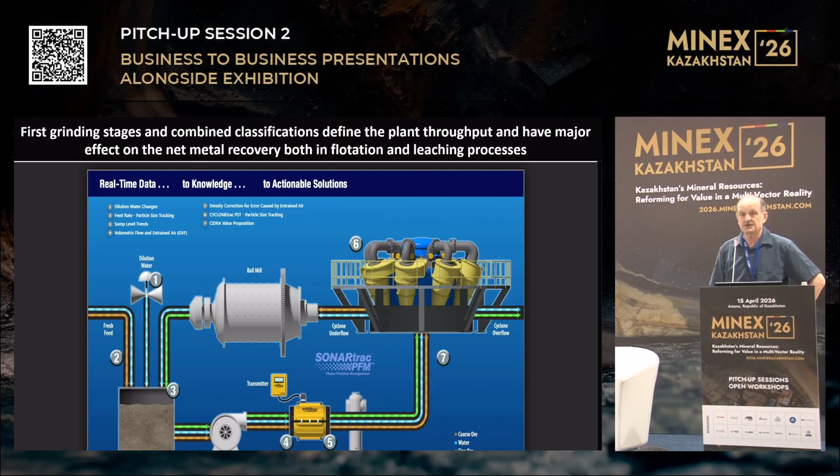Our flow measurement is able to detect the behavior of the feed flows there, and especially to detect if you are having too much air in the flow, disturbing the flow and stable operations of the cyclones. So we are safely able to run the cyclones closer to their roping point where the cut is sharpest, and that is the target to provide a sharp particle size distribution to the following stage.

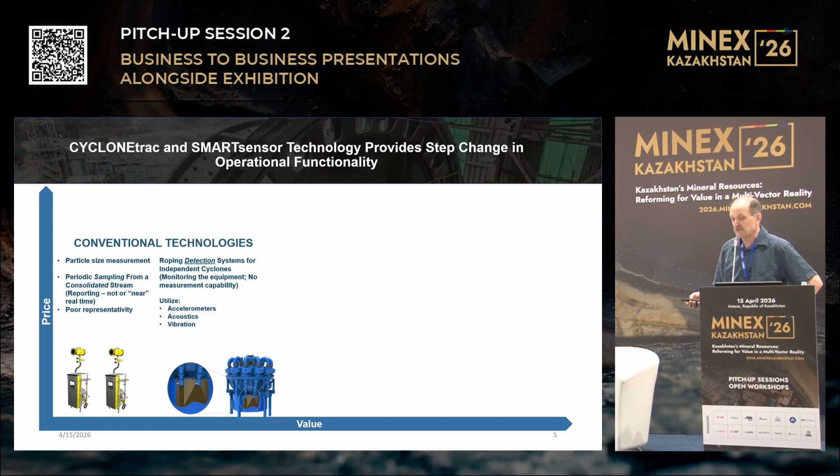So the conventional technology with hydrocyclones has been to take samples of the consolidated flows, and then you have roping detectors to monitor the devices. Those roping detectors are not able to measure the particle sizes, they just monitor the devices, and the sampling is not representative, and it's not real time.

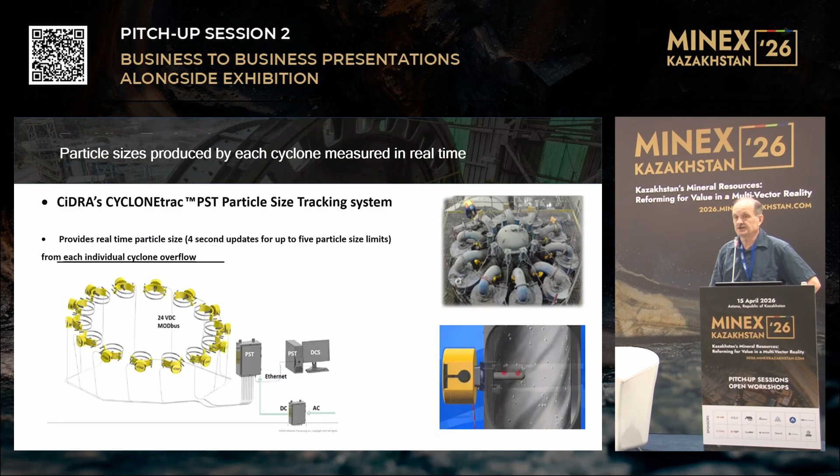So now we have a new system that measures directly something like 5 to 10% of your production, the particle sizes, in real time. Based on that, you can in real time control the grinding and immediately see which one of those cyclones in the battery is behaving well or badly, and take immediate action to take off-grade production hydrocyclones and replace them with proper ones.

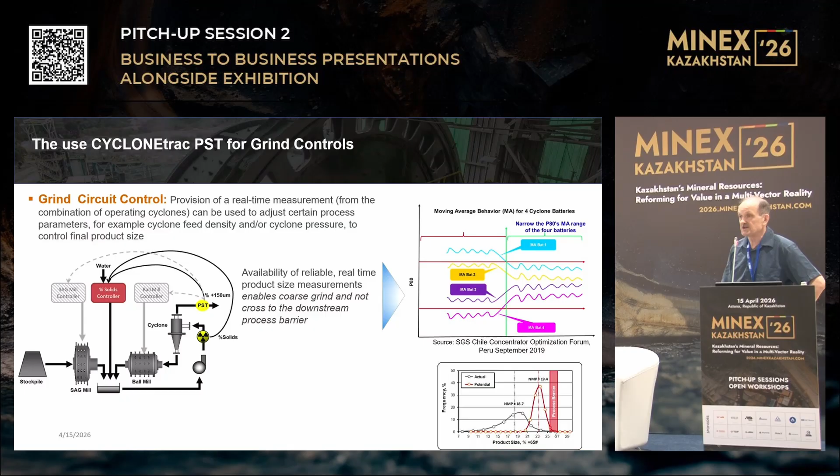So we can squeeze the particle size distribution to be far sharper in the following stage. And based on that, you can do the control trade-off between throughput and recovery to maximize the net metal production. Our customers have reached up to 10% increases in net metal production based on this.

Here you see a control situation where some cyclones in the battery have gone roping, so the control system based on PSD has been immediately reacting to that and taking those cyclones out of operation, replacing them with correctly operating ones.

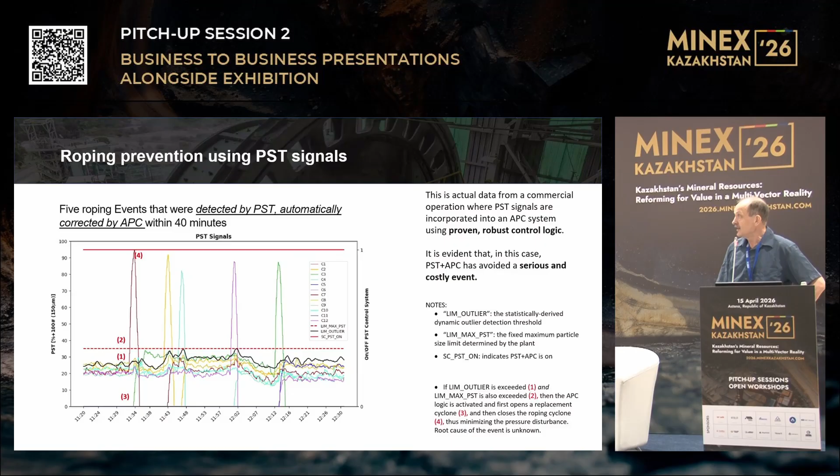Also, you will get statistical information on the use of all hydrocyclones, how their particle size production has been behaving, whether it's been within targets, and based on that you can do preventive maintenance for the cyclones whenever needed. Of course, you will get the trends from every measurement, and based on that, you can also calculate the P80 value trends and everything else you need from this system.

So how can we be sure that this control of individual cyclones is providing value? Here we have a test, 100 days, running with the old system and with PSD-based controls, toggling 1 or 2 day intervals between these controls with the same targets.

First, this picture on the left shows where the target is the same tonnage. You can see that we have been able to increase the recovery there, and the value of that would have been something like $8.7 million per year.

Then, when we are grinding to the same size of product, the benefit is even larger, because we are increasing the throughput so much. And that is $27 million per year in this case.

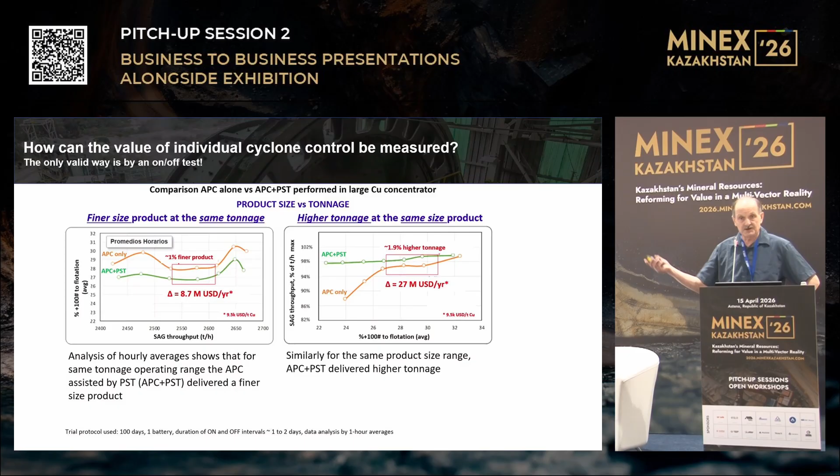And typically you can do even optimization between these, and so in this case it was leading up to $30 million per year.

So based on this increased net metal production, you will often get several percentages higher plant throughput, improved recovery because the particle size control is tighter. You will reduce energy consumption in grinding, and have improved operational stability. About 1/3 of mined copper in the world is processed nowadays with controls of cyclone PSD. Of course, no matter what the mineral is, the same technology works there.

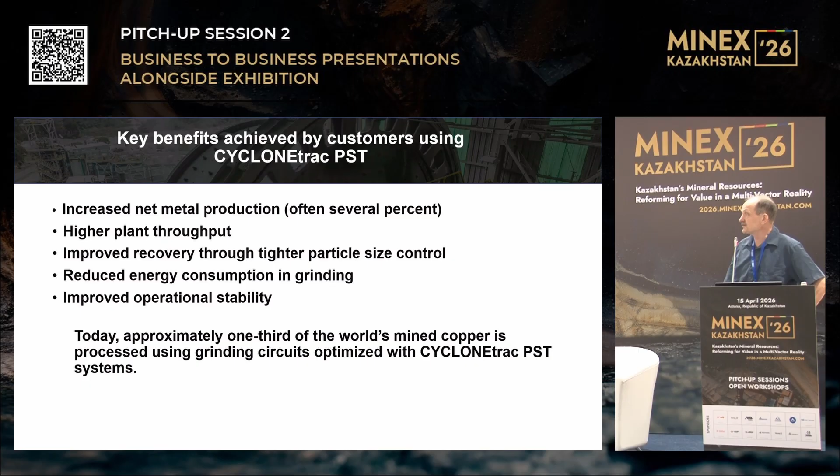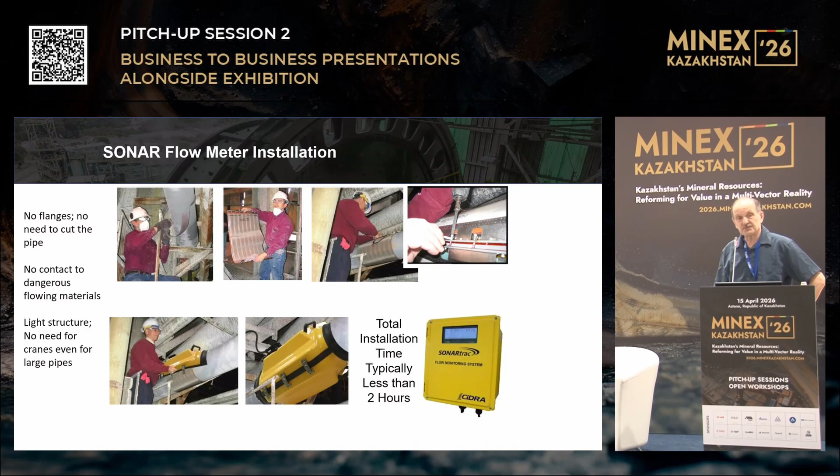Let's take a look at the passive clamp-on sonar. It's simply a mat that we wrap around. It's not in contact with the flow, doesn't wear, doesn't need any maintenance. It's a very light structure, easy to install even while the process is ongoing, and even for large pipes it's still a very light structure to install.

It's a multiple measurement system, so it measures the volumetric flow. It's the only system that can measure the volume occupied by air bubbles in the slurry, and based on that we can correct the errors that it's causing to density measurement, and also minimize the air content in the processes. We had an Australian gold producer that systematically minimized this air content in the slurry in their process, and they said that as a result they were producing 3,000 ounces of gold more than before. No other changes were done.

Then we get the diagnostic information on the flow and process. And we have really had already 20 years of usage of these without maintenance. Not good for our maintenance business, but our customers are happy.

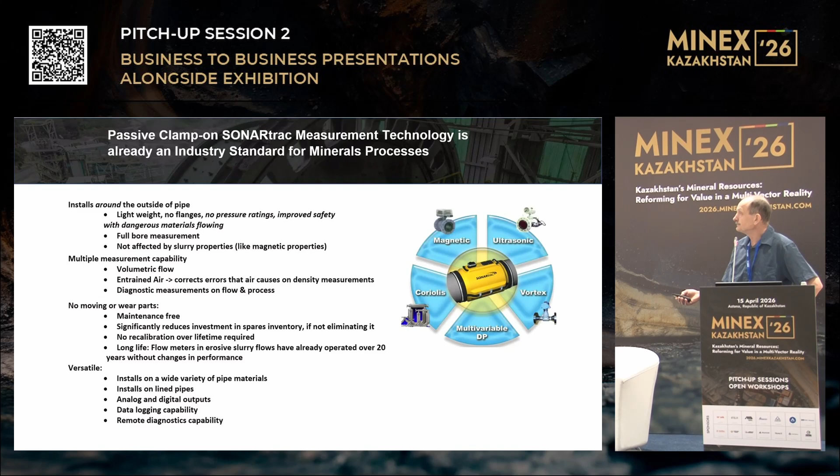Because there is always material distribution in the pipe caused by gravity and inertia of those particles, that is causing errors for the magnetic flow meters. They assume that the material distribution is always homogeneous within the pipe, but with slurry it is never.

Then the air content - this is how you see it causing problems, because if you are having air, the pumps are sucking in air and losing their capacity to provide further production. In this case, in this hydrocyclone battery feed, they have lost up to 25% of production capacity just because the pumps have been pushing air forward instead of slurry.

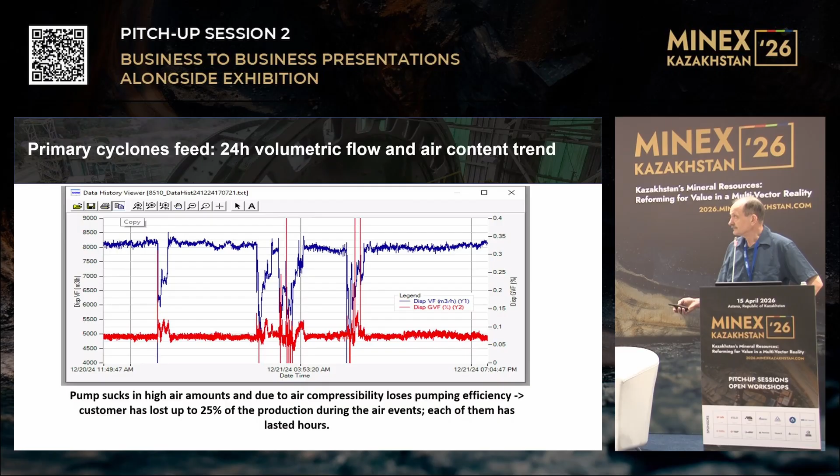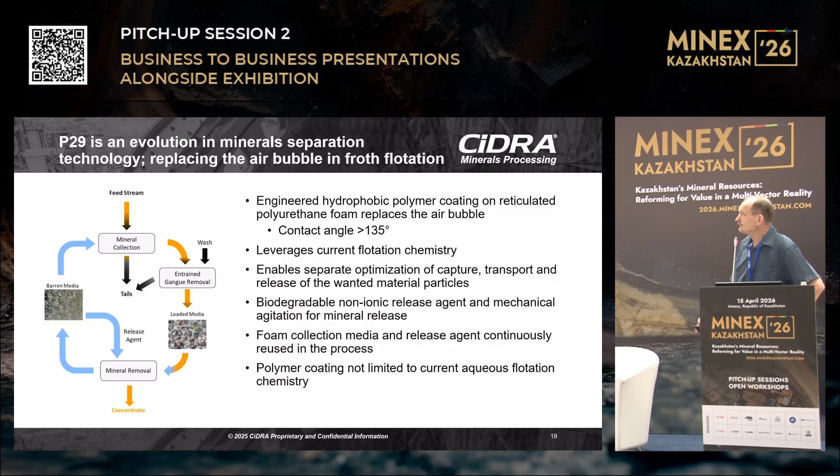Then let's move on to P29, which is the next step change in minerals processing. Instead of air bubbles, we are using engineered hydrophobic polymer coating reticulated polyurethane cubicles to capture the minerals. Cubicles like this, the porosity can be tuned according to the particle sizes we want to capture. We are using the same flotation chemicals to cover those cubicles, so the capture area is very large.

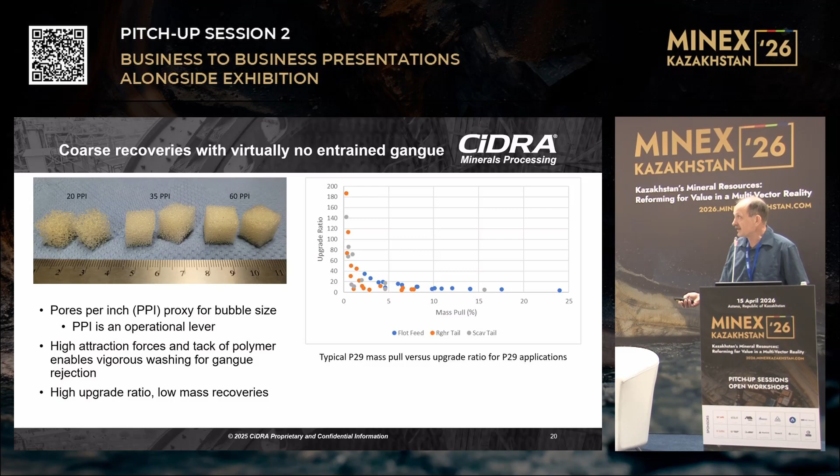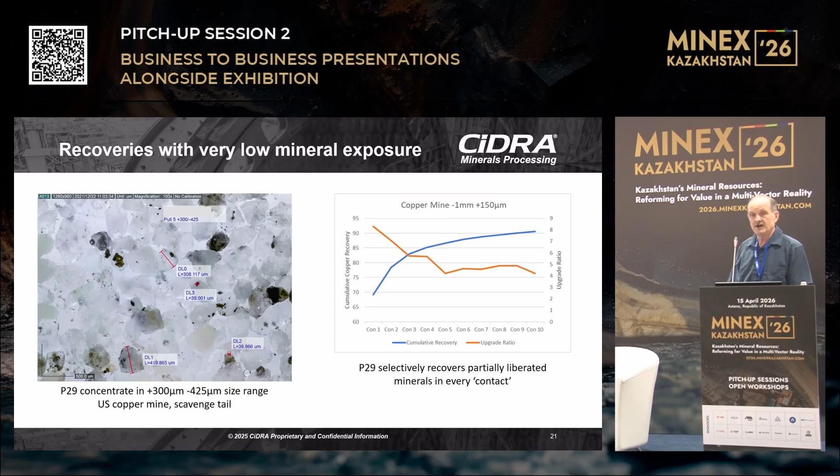We simply put those cubicles and the minerals in a drum, mix them and rotate them. That process we call contactors. You can see that we can easily capture the dark dots, the valuable minerals, so very low exposure for large particles that we can capture safely by this. We can tune the recovery up to whatever you want by increasing contactor rounds. You can see that even after 9-10 contactor rounds, the upgrade ratio is still more than 4 - four times more valuables there than in the feed line.

The process is simply like this: with the contactors, we take the coarse feed in and capture the loaded media to a separate release circulation, where we use release agent to wash the concentrate out. The release agent is rotating there all the time, and the cubicles are sent back to the beginning of the process to fetch up new minerals.

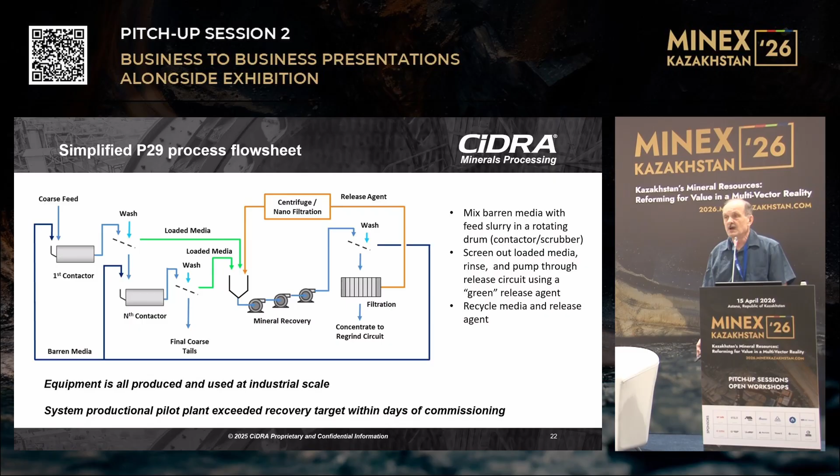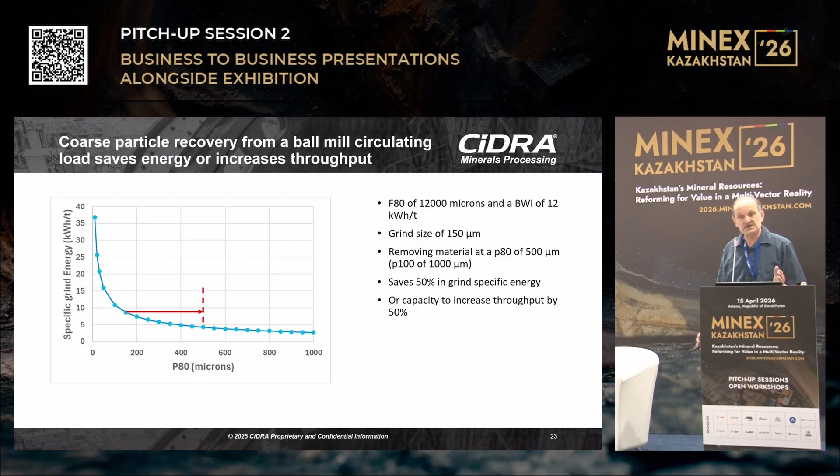So if we can raise the grind size P80 value from 150 to 500, we are already saving 50% of the grinding energy. Or alternatively, we are freeing up 50% of grinding capacity for new throughput to increase production. Simultaneously, if we increase the tails P80 value, because we are also producing rougher tailings by this, we will improve the water recovery, double the water recovery, and save lots of water in processes.

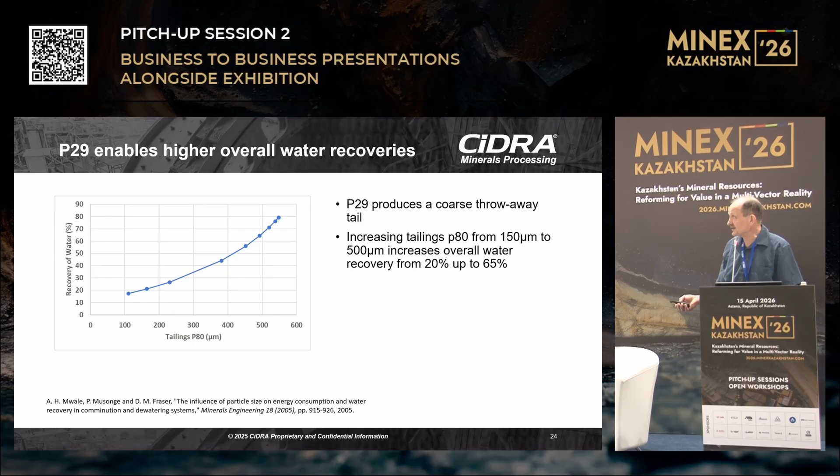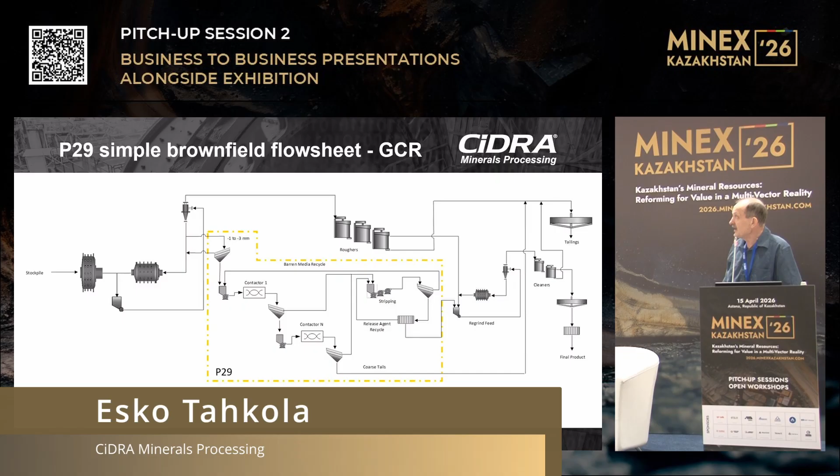For greenfields, that basically means that you need only, after crushing, a couple of HPGR mills, and after that P29, and that's all. Very cheap investment.

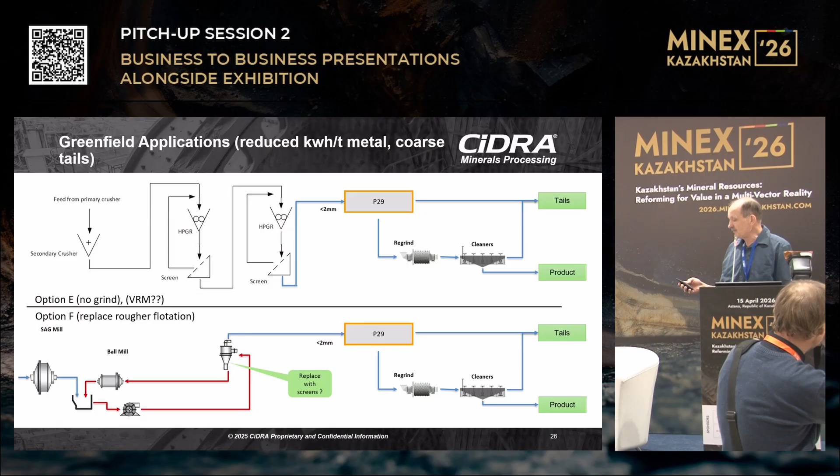So you will typically get 20 to 40% increase in grinding circuit throughput. We reduce grinding energy per ton, improve recovery of poorly liberated minerals, significant improvement in water recovery, and more stable and cost-effective tailing streams with improved tailings management.

The first full-scale plant is expected to start next year.

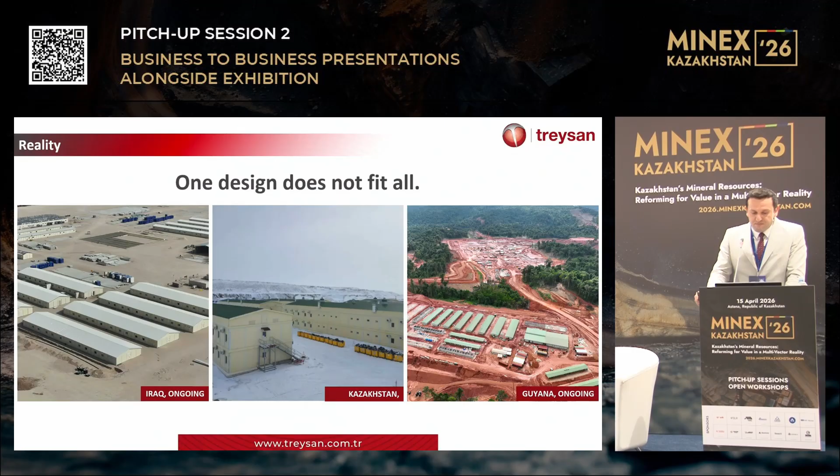So, as you can see from these images, they show us that we have delivered our projects in different types of geographies with very different and difficult conditions. And that's why the projects also are in need of a customized and tailored approach.

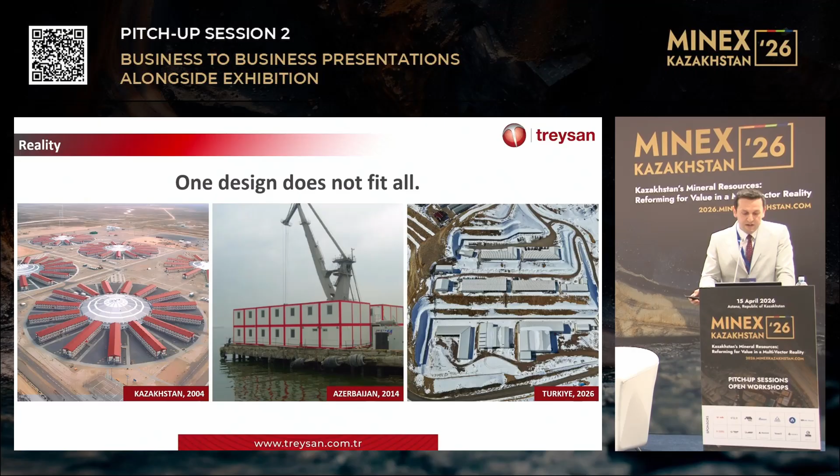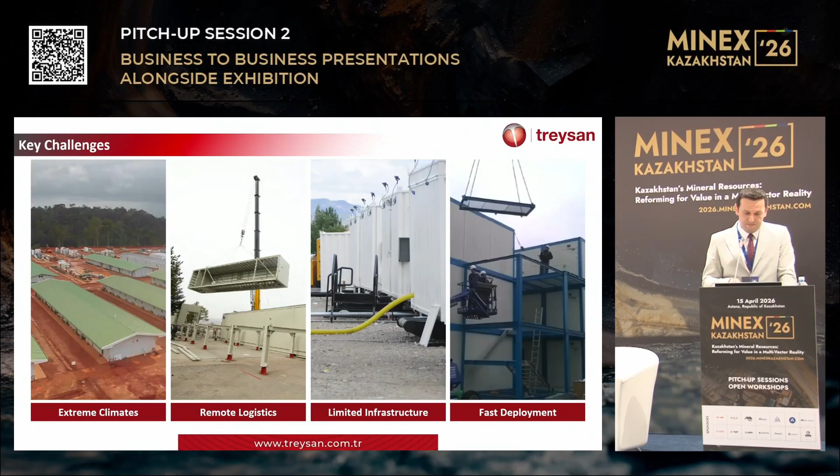And that's why design becomes critical. At TREYSAN, we consider multiple factors, such as climate adaptation, insulation systems, structural durability, and layout efficiency. Because design is not only about the drawings, the CAD files. It is something bigger. It is about your product's performance in real conditions.

And that brings us to our core approach. We are not just container suppliers. We provide full camp solutions, and we do not deliver individual units. We deliver fully operational systems that support our clients.

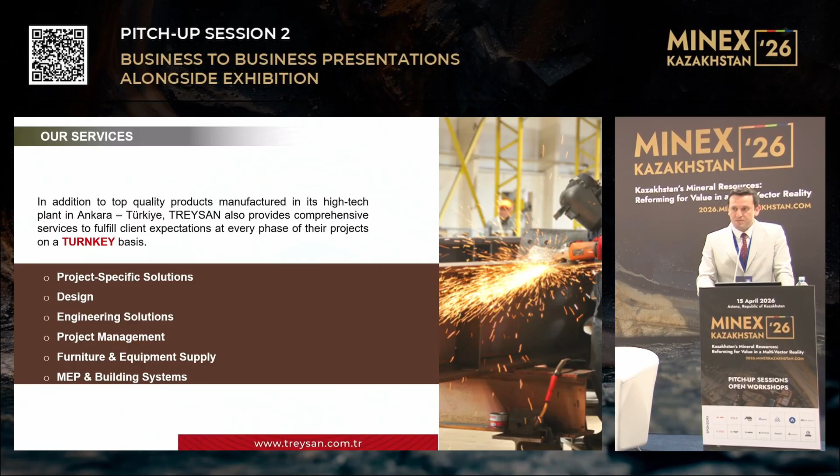And in addition to our manufacturing capabilities, we provide comprehensive services across the entire project life cycle, which are design, engineering, project management. We also support furniture supply and after-sales services. So that gives you turnkey solutions. And when our clients work with us on turnkey solutions, it gives them a big advantage, because there is only one responsible company that will answer for their needs.

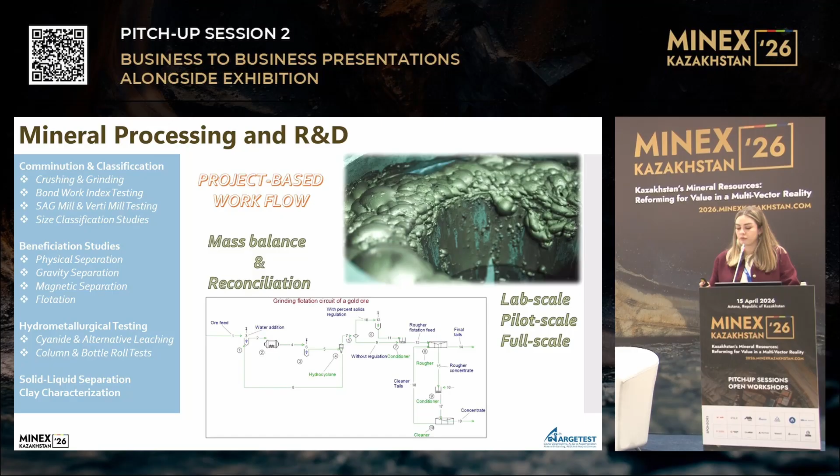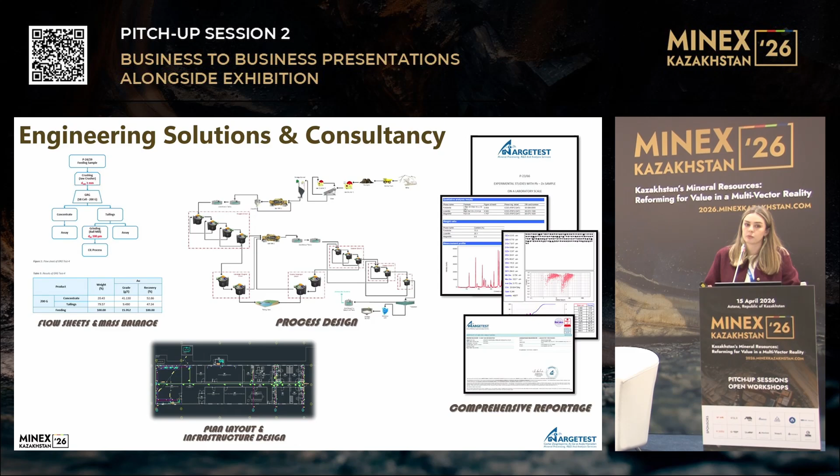After doing the mineral processing test work, we also do the full process design. We develop a flow sheet and do the whole mass balance on the system, from the feed to tailings and the product. On the further stages of the project, we also do the plant layout and infrastructure design for the utilities.

We also have mine site laboratories, so we can help you with a laboratory located on your mine that will do analysis only for your company. We can also help you with mobile sample prep labs that can be located right where your geological exploration is, and when you are moving, the mobile sample prep lab can move with you.

As I told you before, we are coming to Kazakhstan. We are planning to open a lab in the Balkhash region by the end of this year. So we will have a full geochemical laboratory in Kazakhstan this year. We are going to have sample preparation, fire assay, ICP, and are ready to support regional mining projects with our high-quality analytical services.